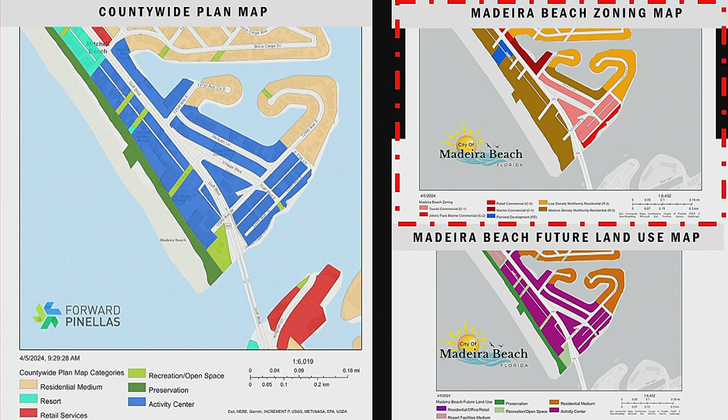This area, the Johns Pass Village area that you can see in these two maps, the activity center - those were designated activity center because we had more non-conforming buildings there that needed to be preserved. So that's where the creation of that activity center came from.

So now, like I said before, we're now looking to the zoning to correspond with those different land uses. So why an activity center in that area? It's really to protect that unique character of Johns Pass Village, to assure that any new development is compatible, and assure that we are consistent with the countywide plan - it's really a proactive instead of reactive approach to planning.

So in the LDRs, the land development regulations, we're looking more at zoning. Zoning really has uses, so we have primary, accessory, and special exception use. Special exception use is where you have to go to the special magistrate for a use.

And then we also have setbacks, building height, which is measured from design flood elevation, and there's also special requirements. These might look like needing an extra 5 feet of landscape buffer if you're next to residential, or an extra side setback depending on the use next to residential.

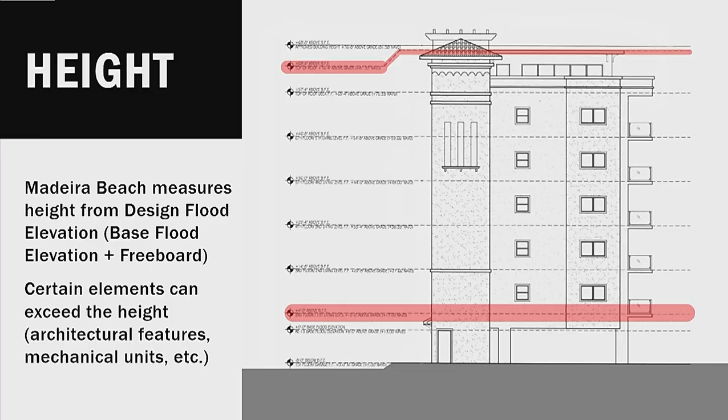In general, that begins to be about your second story, so your first story typically falls below that and then above that. For commercial, they are allowed to build below, provided they flood-proof it, so you are allowed to use that for commercial and parking.

What we've also done here is, people like to talk stories - 6 stories, 5 stories, whatever people want - but stories can vary in height, so we typically don't use that to measure how tall something can be. We do like to use feet. We find that today a story height is greater than what it used to be, which is why you have higher ceilings and stuff like that.

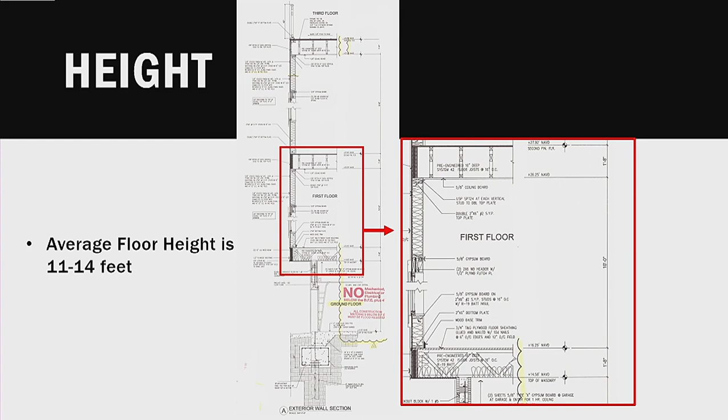If you can imagine, a story height here would be like 11 to 14 feet on average. It's also what you don't see - you have your ceiling, and from your ceiling to the top of the next floor is where your ductwork, lighting, plumbing, sprinklers, and that kind of stuff can be. So as we go through this conversation, we consider the average story between 11 and 14 feet.

When it comes to setbacks, those are the distance we measure from the property line to the outermost exterior edge of the structure at grade. So all components of any building must be within that setback - whether it's a column, your slab, any portion of your ground floor has to meet the setback, so you can't encroach.

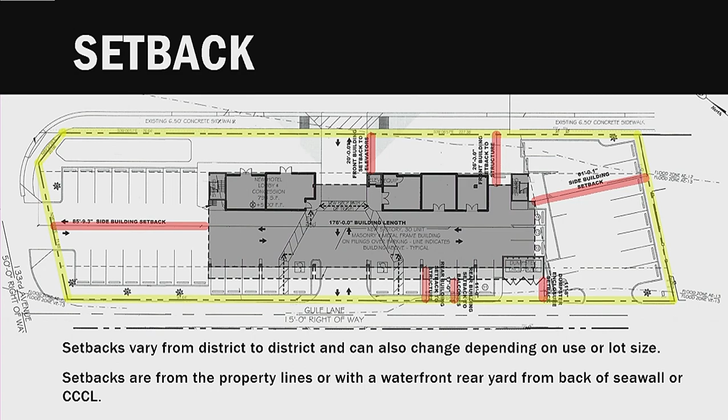As you go into your second story, our code does allow, for instance, a balcony to cantilever 4 feet into the setback. So as you get higher, there are some allowances for patios and decks, but that is still controlled with measurement of depth compared to your setback and your property line.

So obviously we understand that things on Boardwalk look very different than things on Pelican Lane, which looks very different than things on 133rd. So this whole area is broken out into 6 different distinct character districts. We'll be going through each of these character districts and asking your opinion on setbacks, on height, and any additional special requirements.

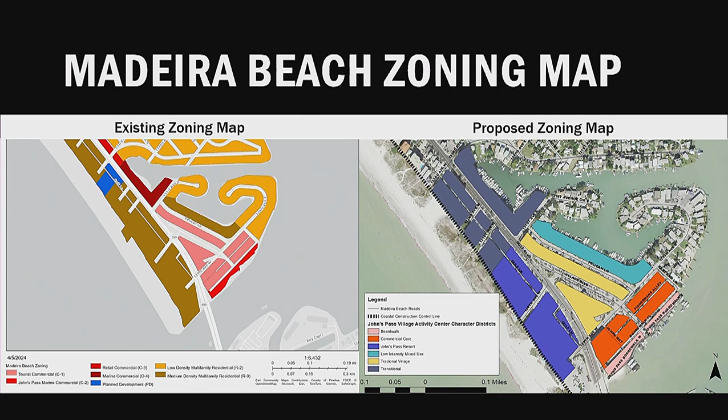So we'll be starting this with Boardwalk. If you can see on the screen, it's really just a sliver, everything that's along that Boardwalk area. The existing zoning is C2 zoning, with setbacks of front 20 feet from Boardwalk Place. The side is 5 feet on one side. The rear or waterfront is none, and the height is 34 feet from design flood elevation.

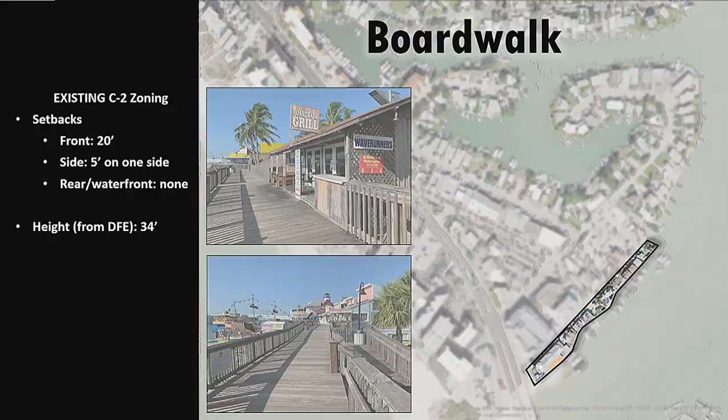So just what that looks like on an average lot, we plucked a lot in that area, put in the setbacks and the height. This is what it could look like just based on the current zoning code. So you have 34 feet measured from that second floor upward to the very top peak of that roof, and then 20 feet in the front and none in the rear, and 5 feet on one side.

And we also grabbed an example of current height. So what we did is try to find building plans of what would be the tallest building in each district. Here in Boardwalk, it's near Hubbard's Marina. We measured from the design flood elevation upward to the tallest peak of the roof, which is 37 feet and a half inch.

And just some pictures of what Boardwalk district looks like and what's unique about that characteristic. So one thing that we will write in the zoning is definitely design guidelines, to keep that characteristic that's important of Johns Pass Village. So we'll definitely have that in our zoning as well.

So what we'll do now is just ask you to talk amongst yourselves in each group. Look at your worksheets, there's a section for setbacks, a section for height, and any special requirements. We'll give you 10 minutes, and I'll let you know after 9 minutes that you have 1 more minute to finish up. Then we'll go around the room and have one person from each table speak about each one of these, and myself, Marci, and Andrew will go along to each table to see if you have any questions.

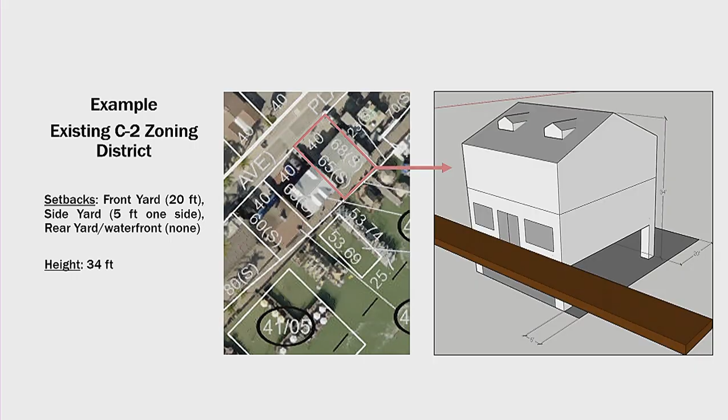What we've been doing is going through district by district, looking at the property appraiser website. This is a snippet of the property appraiser website. It shows you kind of where the property lines are, but they're not always accurate. And then trying to measure from, say, Google Earth, if we don't have the building plans, which a lot of them we don't. So we couldn't give you an exact accurate answer, but we can kind of guesstimate.

A lot of them do meet that 5 foot on one side, but there are some that don't. So it's some that do, some that don't. That doesn't give you the greatest answer, but that's what we're doing.

Yeah, what I was going to say is, do you possibly have something that shows the flood zones, like 10, 11, stuff like that? It might be helpful for some people to be able to pull that up. We can look at it on the screen, and then you could show them plus 4, and it might help. I don't know, that could help. Yeah, Marci's getting that up right now.

And then just what Marci said before, grade can vary depending on where you are as well. So keep that in mind when we're talking about height.

Can you pull the example up for Hubbard's Restaurant, please? Of which one? Hubbard's Restaurant that you just had up there. Yes. Which one? Oh no, sorry, my computer's not working.

Yeah, okay, here, let me... oh great. We were having issues with our computers and internet earlier on multiple laptops, so it looks like it might be frozen again. Okay, we'll just have to restart it. Y'all can talk amongst yourselves, I'll bring that back up.

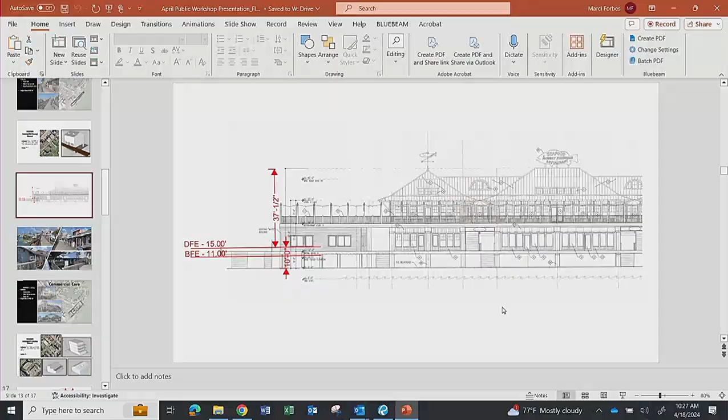Of Hubbard's Marina, do we want to bring that back up? It's on PowerPoint. Now it's up. So the example you have there, the DFE actually starts just below the window line. So basically, to rebuild, they would have to have a higher height, or lower the height of their roof.

Yes, right. Because this was built before we got new flood maps in 2021, and then also updated the freeboard. Freeboard used to be 2 feet, now it's 4 feet. So if we kept it at 34 feet and they had to rebuild, they could actually just adjust the height of their roof.

They could always adjust the peak, but it would have to be lower. You have a good point though that currently it doesn't meet the design flood elevation. This is a coastal A.

I think everything on Boardwalk is coastal A. There's a part of it that touches all of Boardwalk. So the lowest horizontal member has to be at or above design flood elevation. So this right here would have to go up to that design flood elevation.

And the front 20 setback is considered the Boardwalk Place, boardwalk facing the street itself. Exactly, it's a little weird, but yes.

And the buildings that are on the north side of Boardwalk, what's considered the front of them? Depends on the legal address. So we don't know if it's facing Boardwalk or if we're facing the other way, like in the commercial core, the other district you're talking about, not in Boardwalk. No, the ones that are across on the north side of Boardwalk.

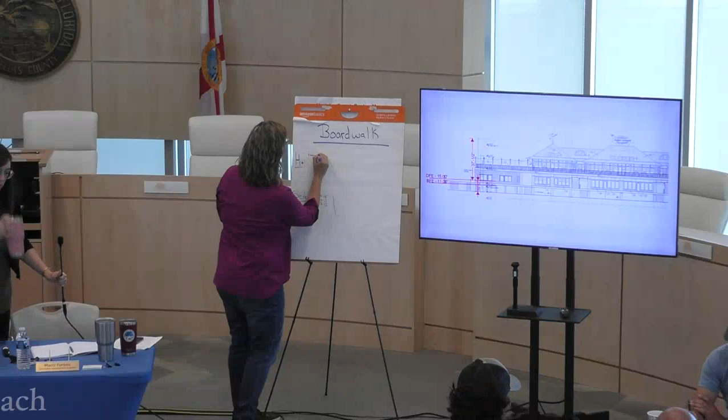For the proposed front setback and use, we agreed on 5 feet. For the proposed side setback and use, we proposed 0 feet. For the proposed rear setback and use, we proposed 0 feet. For the proposed height, we maintained 37 feet, 0.5 inches, so that the existing building at that height can remain, and none of the others can go any higher. Our only additional comment is maintaining a walking-friendly area, focusing on pedestrian-friendly development and design.

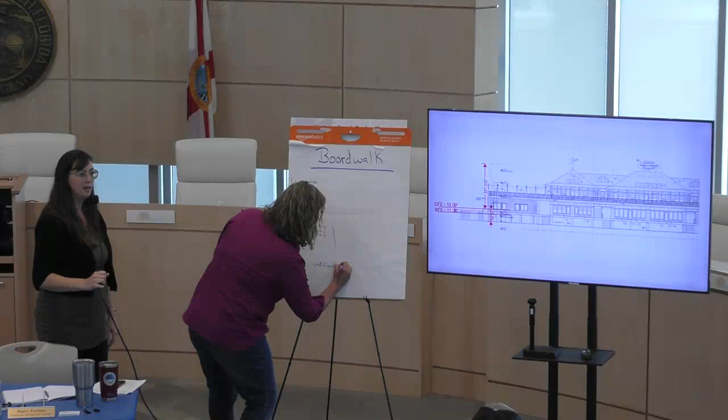All right, next table in the back there, who will be the spokesperson for this table? They're still confused. Did you have questions?

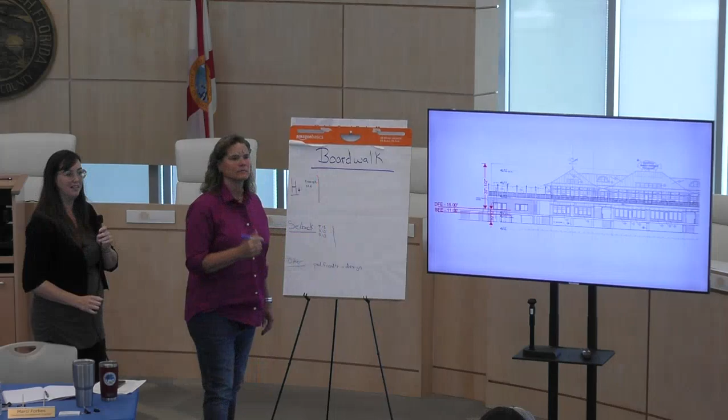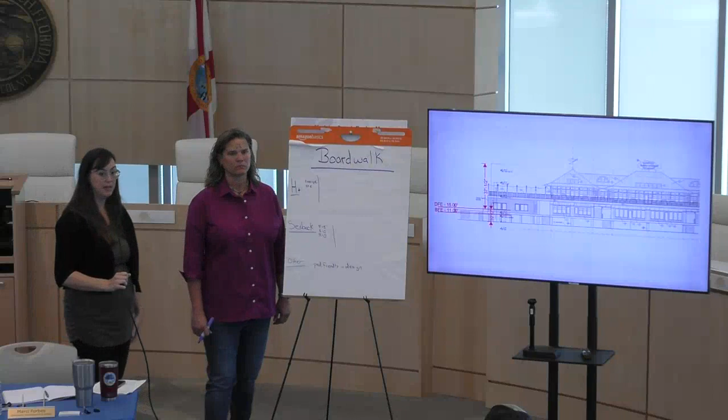Question on the boardwalk: will they have to update the width of it to maintain more traffic flow on the boardwalk itself? The boardwalk is owned and maintained by the city, so that's off of the property line, which is at the seawall, so it doesn't go to the boardwalk. If they expand it to update it, will that affect the setback eventually? We wouldn't be expanding over into people's property.

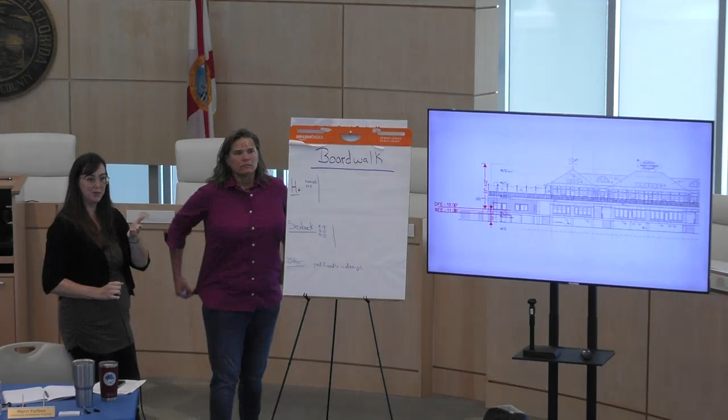Did you all want to talk about your opinions on height and setbacks? They said they didn't discuss that. Okay, so we're going to go to the next table.

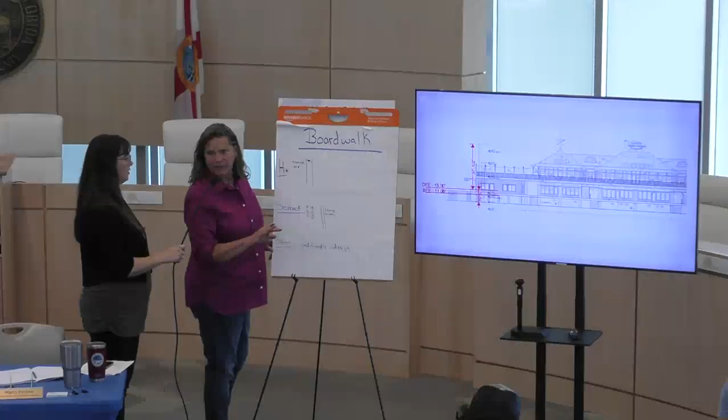And then for the height, we agree with 34 feet. The 37.5 would have to be non-compliant and would stay non-compliant. Any other special regulations you discussed or anything important in this area? No? Okay.

You guys next? Okay, on the street side we had a little back and forth between 0 and 5 feet. The business people like the idea of 0, being able to build right to the road, and the pedestrians like the idea of 5 feet, being able to walk.

Setbacks on the side, we went with 0. On the rear, we went with 0. And the proposed height, we were okay with it going up to the 37 and a half that's existing, with the only additional comment being no taller than that. Otherwise you're going to have a couple of short floors or short attics, something's not going to be the same as it is now.

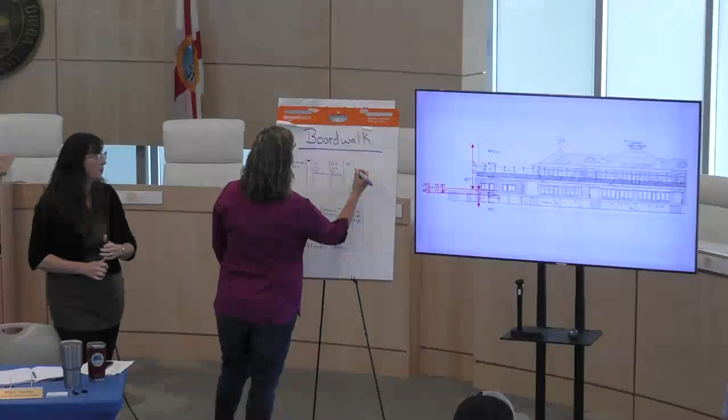We're still having a little discussion on the height, can we have one second? Are we thinking about future build? Property owners may want to build up. 34 feet makes it difficult to get more than two floors. I guess the consensus is to go to 37 feet. But y'all were discussing 34 or 37? That was kind of between those two. We can note that. They decided 37, but there was also discussion of 34, so they weren't unanimous. Any other qualities or anything else important to note in this area?

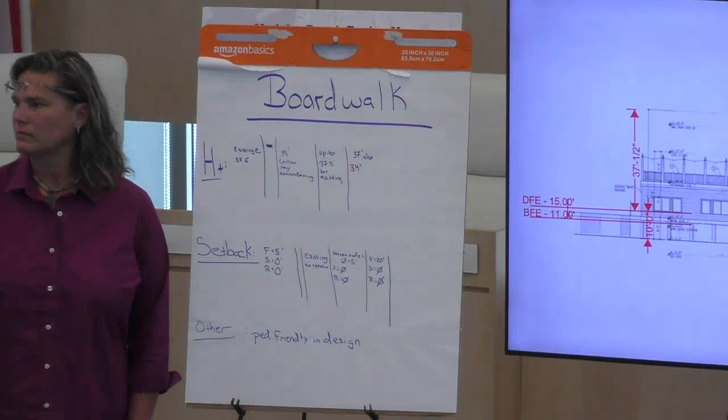Walkability. Thank you.

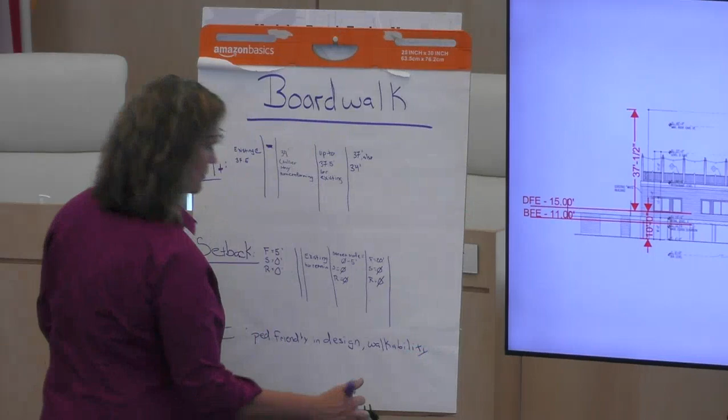Okay, great, we're going to move on to the next district. It'll be very similar to what we just did, except we're going to the commercial core district. Here's where we have the parking garage, and then some larger buildings. This is existing C1 zoning, so it's a different zoning district.

These setbacks in the front, now all of these are from the property line, so keep that in mind. The front is none, side is 10 feet on one side, the rear is 25 feet, and the height is 34 feet from design flood elevation.

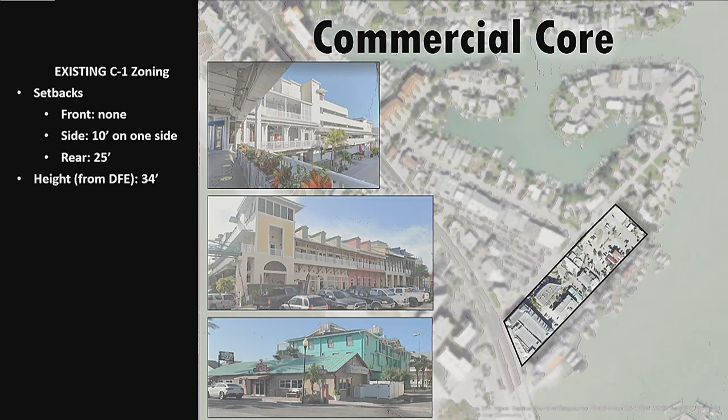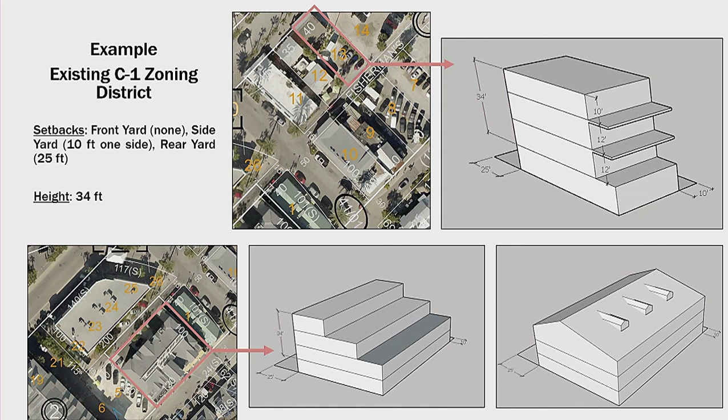And here's some examples using different size lots of what that could look like based just on the zoning code. So we have 34, generally starting at the second floor. Remember what Marci said before, any commercial you can flood-proof. If you're residential, you cannot flood-proof that ground floor. It has the setbacks here, the height.

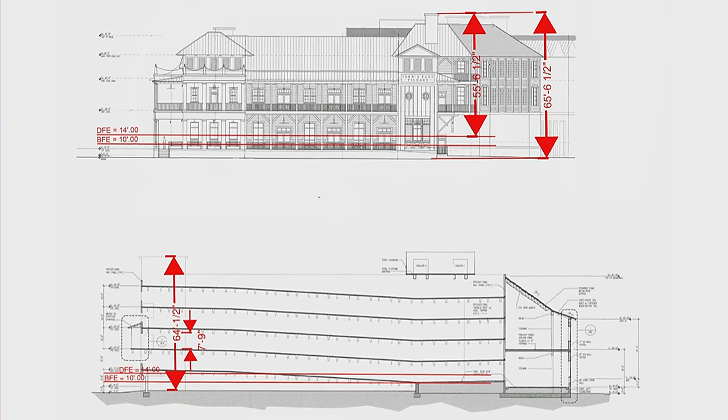And then the tallest building that we could find, which I believe is accurate, is the parking garage. You can see in this picture, the design flood elevation being 14, and then above that is 55 feet and 6.5 inches, so 55.5 feet. And then just some pictures of current buildings in that area.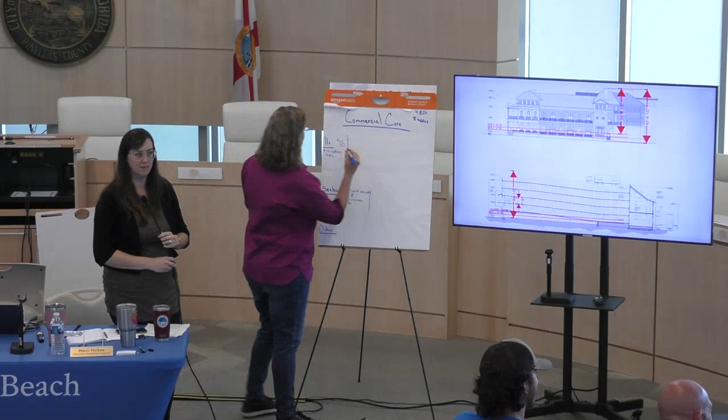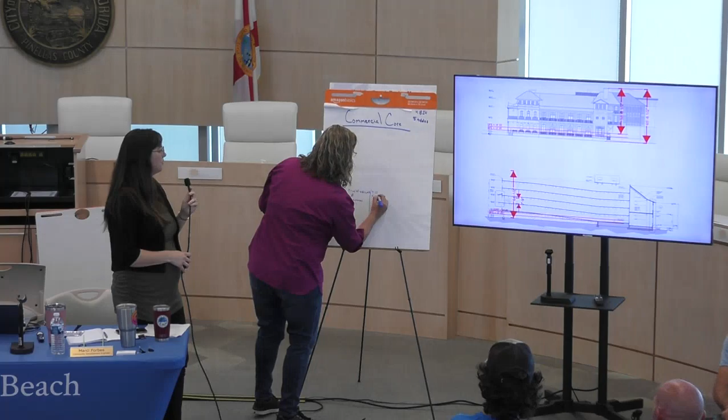All right, we want to keep the height at 34 foot, which is currently existing, and the rear setback at 25, and the side at 10 on one side only. No change in setback on contiguous properties, 10 foot on one side, and that's what we have. What was the front again? The front was none. None, okay, thank you.

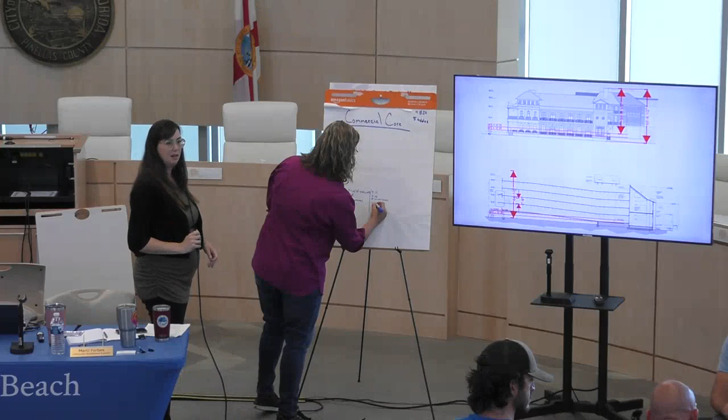Okay, but at the current conversation, front setback is at 10 feet to match the rear setback, 10 feet, so 10 and 10. Because some businesses face one way, some businesses face the other way, we feel like 10 feet would give some symmetry, uniformity on both sides.

As far as side setbacks, we couldn't come up with a number, but we did agree that it should accommodate pedestrian use, whatever that side setback is. And I'm just going to bring up from the last workshop, something that kept being brought up is, say if your lot is larger than half an acre, or your lot is wider than 50 feet, then maybe you would have a larger side setback.

Something like that, just throwing that out there. So height, we looked at what's coming up in 2 sessions is going to be the low intensity mixed use at 44 feet. And we thought if the residential mixed use can go to 44, we feel like the commercial core should at least go to 44.

And that's not a unanimous decision. Okay.

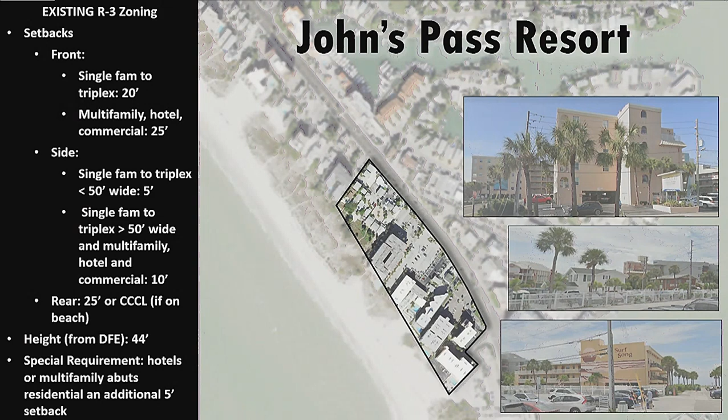The rear is 25 feet, or if your property is along the beach, you'll have the CCCL line, which I'll show you in the next slide, and you can build right on that line. The height from DFE is 44 feet. And there is that special requirement that if hotels or multifamily abuts a residential area, an additional 5 foot of setback is required.

And then what Marcy talked about in the height, it can really vary on how high your stories are. We see an average of about 10 to 14 feet for each story, and we're seeing more and more as the years go on. So with 44 feet, you might have 3 stories over parking, or you might have 4 stories over parking, just to give you an idea of what that is.

And then here's one of the older building plans we could find. This is Beach Place. From the current design flood elevation, it's 50 feet and 8¼ inches. Mechanical units can exceed that height, so we're really measuring from the top of that roof structure.

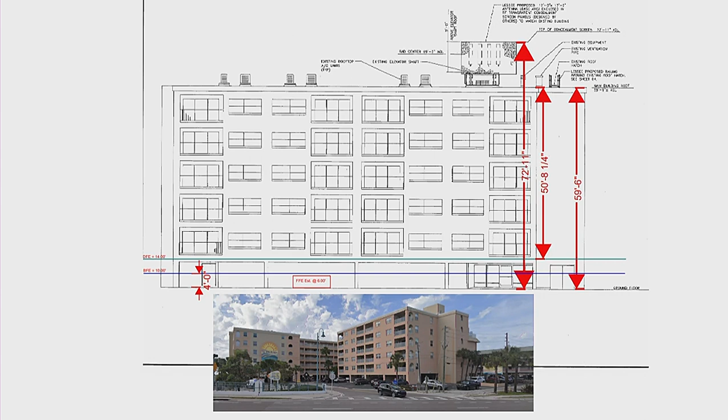An example on smaller lots, because we do have smaller lots, some single-family, duplex, triplexes in this area. So we also want to make sure that we recognize and protect these properties. This is what the setbacks look like on a smaller lot.

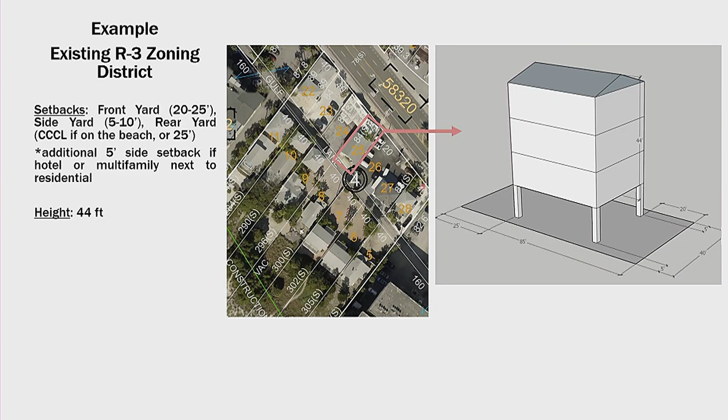And just some pictures of that district, showing the variation of larger condo buildings and smaller properties as well.

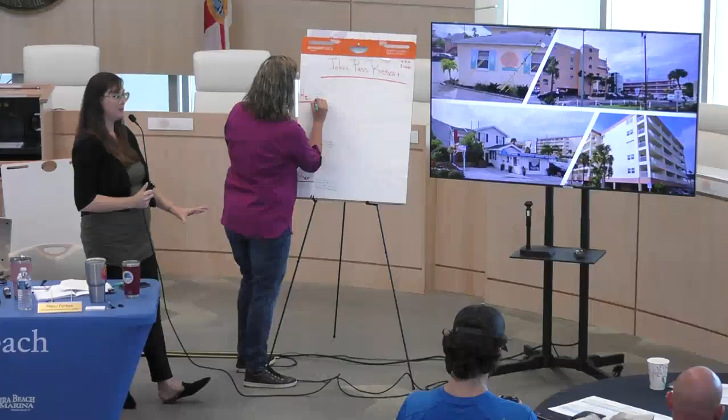Oh, height, we didn't talk about height. Did we? Oh, I must have missed it. Maintain existing, all the way across the board. Existing in the code, so that 44? Or, okay, 50. So what's built there? Then 50? Existing, existing built, so 50. Okay.

Perfect, and we're still looking through building plans. Like I said before, a lot of these buildings were built before this current zoning code, and there's some that we cannot find building plans for. So we're in the process of seeing which ones we can find building plans for, and then anything taller, we're going to work with our building official to get those heights as well.

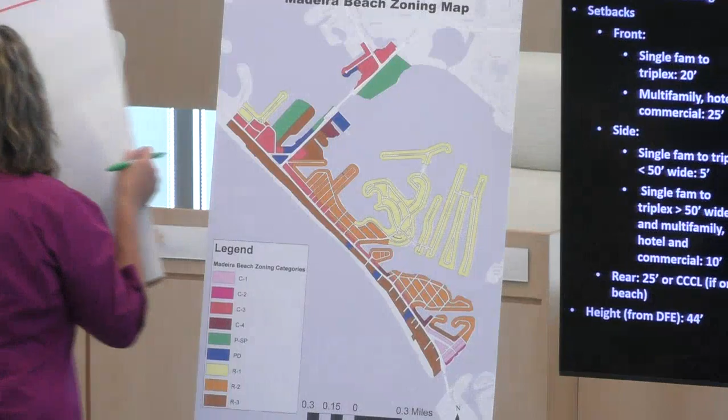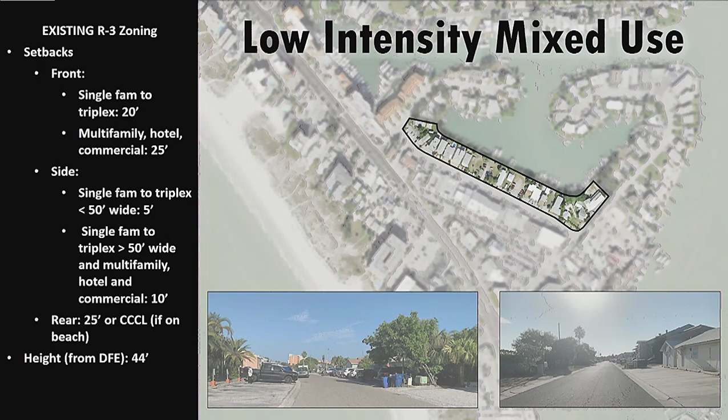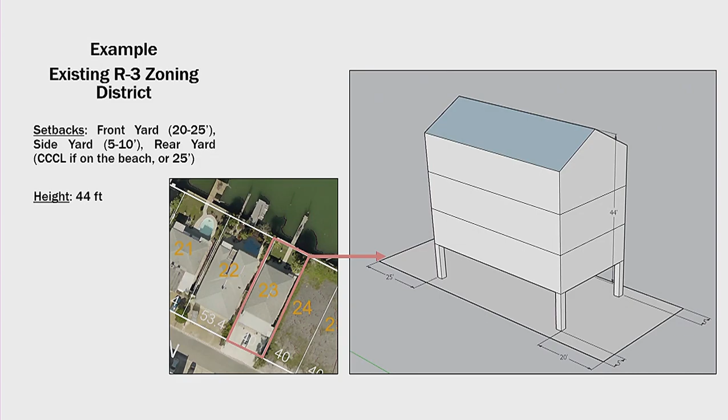Okay, so now we're jumping back across to Pelican Lane, the low-intensity mixed use. This is R3, so you have the exact same zoning, so I'm not going to go through that since we're running low on time. Here's an example based on one of the R3 lots over here in Pelican where we imposed those setbacks that are in our code right now, and here's an example of that 44 feet being built back there, plus some photos of what is on Pelican now. All right, I will start the timer.

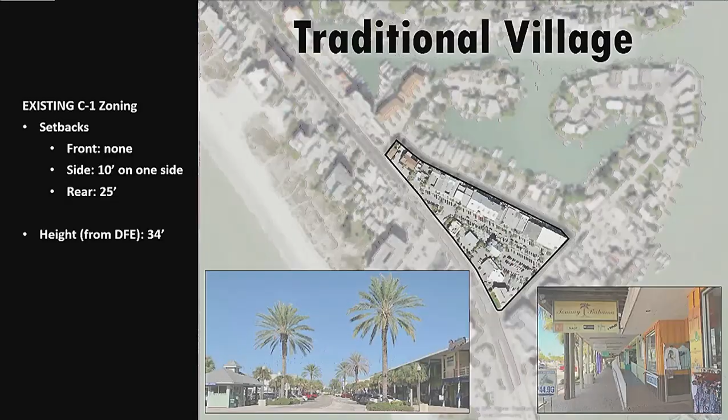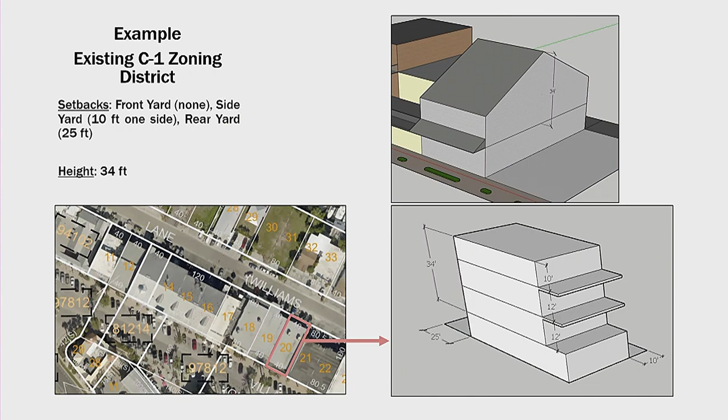So now we're jumping to the traditional village, back to C1 zoning, which is more focused on commercial development. Setbacks in this zone: front are none, side 10 feet on one side, rear is 25 feet, and the height is 34 from DFE. Here's a few examples of what that could look like. One of the few building plans we could find was of this tower near the brewery, and from DFE that's 31 feet, 1 3/4 inch, so I'll just say 31 feet and 2 inches from DFE to the very top of that.

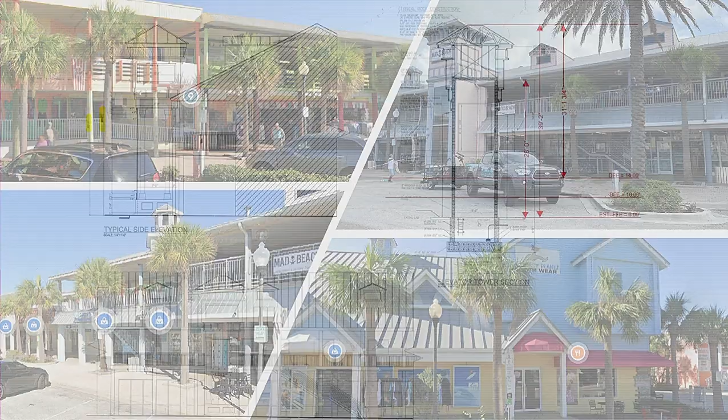All right, so the finished floor elevation, the grade is around 6 feet here. And then it looks like the base flood elevation in this area is 10 feet, and our freeboard's 4 feet, so starting there. Okay, the timer's going, and we'll have one more district after this.

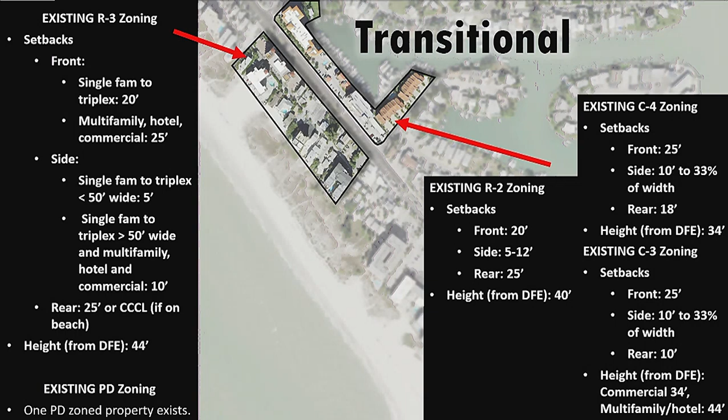And here are the setbacks. I don't want to dwell on it too long. Here's examples of the C3 and C4 zoning. They're very similar. Front yard, 25 feet from the property line. Side depends on how wide your property is, so it's either 10 feet as the lowest, or if you have a wider lot, then it's going to be 33% of the width.

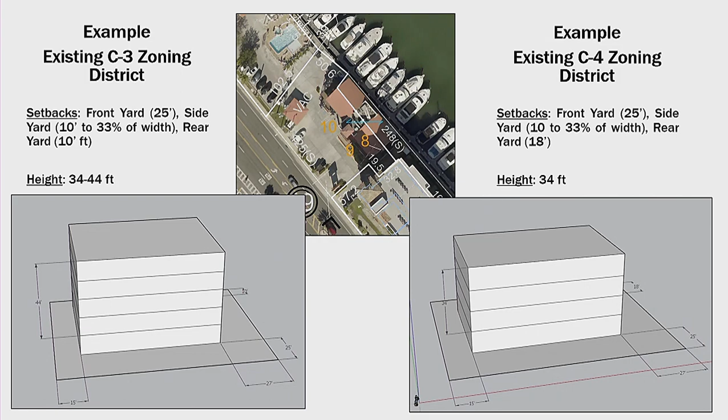And then the rear yard, if you're in C3 zoning, is going to be 10 feet. If you're in C4, it's 18 feet. And then the height is 34 to 44 feet, and that variation in C3 is based on use.

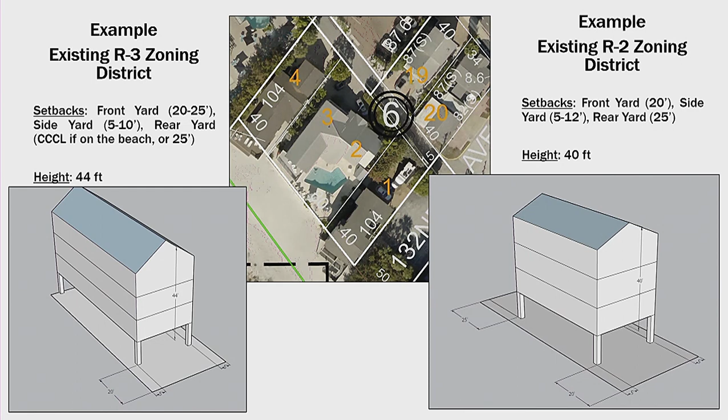And then examples of the R3 zoning, you've seen this before, just some examples of what that looks like. The R2 looks similar, the height is 40 feet, so a little smaller, but like I said, there's just one little sliver that is R2. And then another example of R3 on a larger lot.

And then some pictures of what is in that transitional district. So similar to Johns Pass Resort District, you do have larger lots, larger buildings, but then you also have single-family homes, and smaller lots, smaller buildings, duplexes, single-family. So keep that in mind when you go through the setbacks and height. We also have others, so maybe there's special exceptions or something special we could write in the code to really protect those single-family homes. All right, and I will put on the timer - this is the last district.